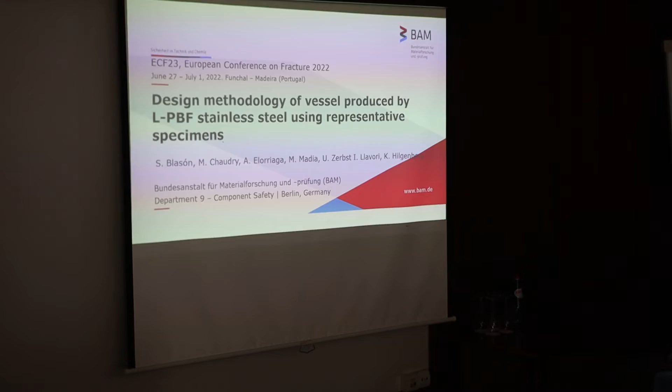So basically the framework of this research project is based on the lack of some regulation in order to evaluate the structural integrity of vessels. You know that when we are using additive manufacturing techniques, still up to now there is no clear idea about the behavior of the materials, and that's why we are interested in developing this project.

In this case, we are taking into account the steel 316L, so it's the same that was used in the previous presentation. And in general, the general aim of this project is basically to develop a design concept of additive manufacturing components in order to identify the most risky areas inside of the component, and from that point try to evaluate the lifetime of the material, of the component in general.

Probably all of us are familiar with the benefits and drawbacks of this kind of materials. We know that there are a lot of benefits in terms of the complex geometry, flexibility and so on, but we cannot avoid the uncertainty in terms of the mechanical properties, mainly due to the difference in the thermal history along the process. And of course, we need to consider the presence of defects that is not possible to avoid, at least up to now. And this also produces different distribution of the residual stresses, which should be taken into account.

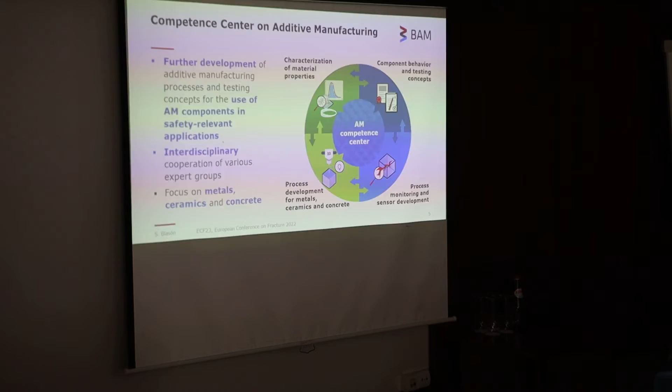I would like to mention that BAM Institute, from the last 2 months or something like that, has founded a competence center on additive manufacturing, and the aim is to try to speed up the evaluation of risky components in order to try to use different components in relevant applications. BAM has a lot of different departments working on different areas. That's why we work with different materials, metals, ceramics, concrete. And since we are an interdisciplinary institution, we have identified different work packages, but in this case the framework of my presentation is involved according to the damage tolerance design. Sorry. Okay.

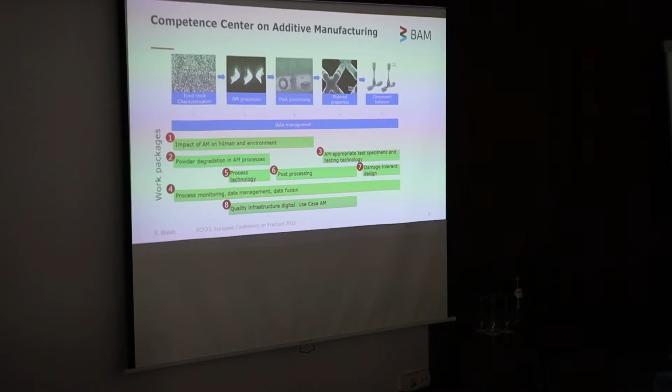So this is the main idea of the methodology that we are proposing. First of all, we want to identify using simulations the most risky area in the component. And from that point, we are going to identify the evolution of the temperature along the manufacturing process. From that point, we want to check the performance of the material by doing, in this case, crack propagation tests and also high cycle fatigue tests. So basically, we are interested in this case in fatigue properties.

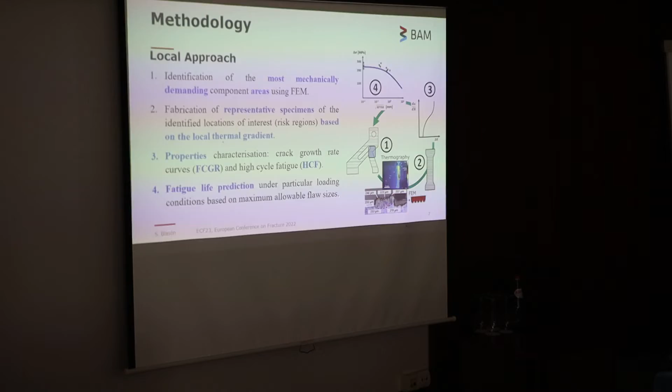And from that point, we want to reproduce some kind of representative specimens, which means that we want to reproduce the same behavior of the original component, but not using specimens extracted directly from the component, but specimens produced ad hoc. And from that point, we want to check the fatigue performance of the material.

So this is the archetype that we are using nowadays. It's a vessel of 316 steel, and the heat treatment was this one, 5 hours under 560 degrees, and basically you can see 3 main areas in the component. The cylindrical part, which can be divided in 2 because we have different thickness, and also the cone, which means that the building direction compared with the direction of the specimens is different in each place, and we want to check the performance in each position.

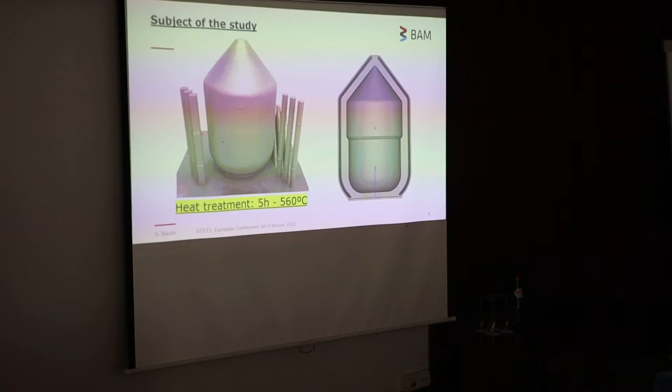So basically, once again, I am repeating a little bit, but we want to compare the behavior of the original component, extracting different specimens and trying to characterize the fatigue response, and then we want to produce some representative specimens, which means that we are reproducing specimens but without extracting directly from the component, and then we want to check the transferability between both sets of results and try to get a good correspondence.

Okay, there is another division at BAM working in numerical modeling, and these results are coming from that department, but it's easy to see that the most affected zone in terms of temperature is the cone, because the time between each layer is lower, so the temperature should be higher in the cone region. And we will see some results connected with this fact.

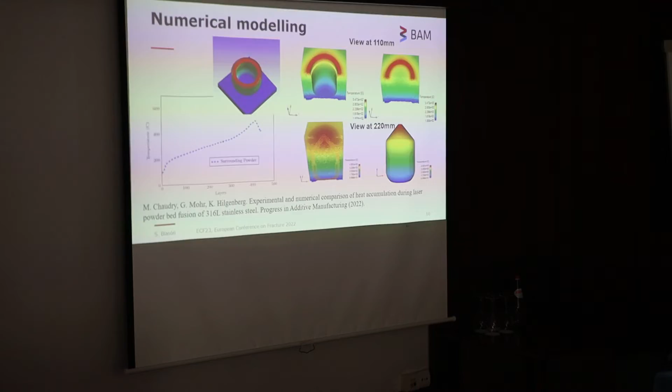Apart from that, since we are basically trying to zone the component, zoning means, from our perspective, trying to identify the most risky area around the component. We are trying to collect as many specimens as possible in order to see any risky area, or what we can call the weakest area of the component. That's why we are trying to collect many specimens.

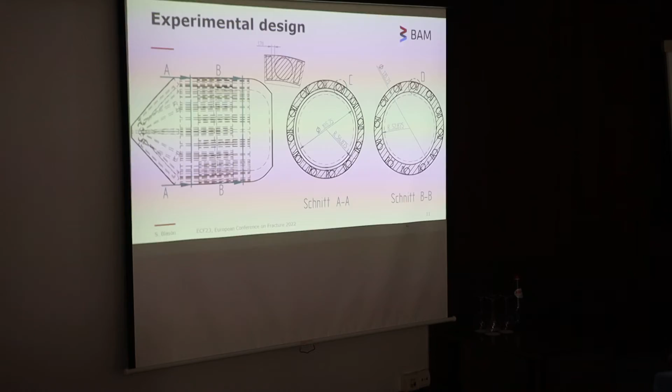We can see the round ones, which correspond to the high cycle fatigue specimens, and the rectangular ones, which are used to complete the fatigue crack propagation test. According to this, for each vessel, we are collecting in total 58 specimens, so we have a lot of information to characterize. And I will show you the main results up to now. I should mention that up to now we don't have the whole results, just preliminary ones.

In any case, according to the fatigue crack rate curves, we are defining a reference plane, which coincides with this one, and we are trying to characterize different positions along the circumferential direction in order to see if there are different responses depending on the position. And you can see here the three regions that I mentioned before. The lower part of the cylindrical part, which has 15 millimeters thickness, the upper part, which is 11 millimeters thickness, and the cone part, which has 45 degrees of tilt regarding the building direction.

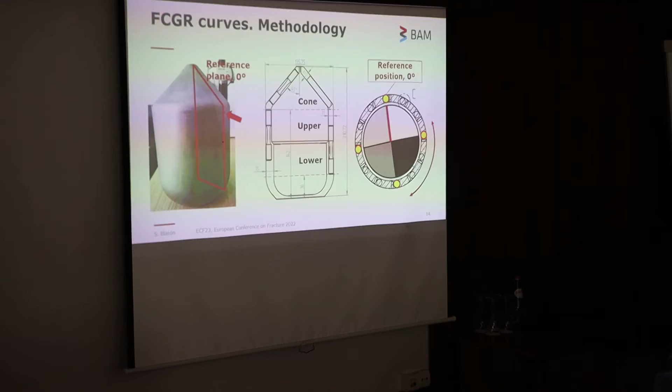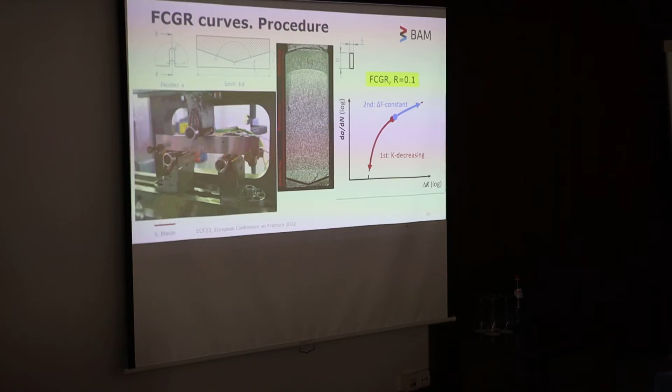And for the fatigue crack test, we are following this procedure. First of all, we go down in order to characterize the threshold regime and also the near threshold regime. And then, if we have enough ligament, we go up in order to characterize the Paris regime. In all cases, we are using the load ratio equal to 0.1. We use this kind of chevron notch in order to avoid any kind of non-symmetrical evolution, because we had some bad experience using the straight notch in the past. Also, I would like to mention that we are using 3 millimeters thickness.

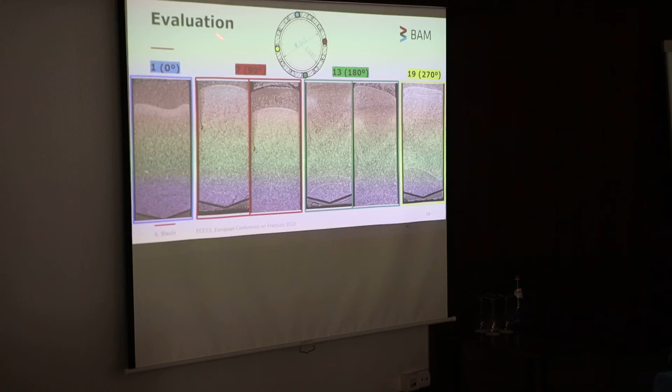And first of all, I would like to show you the images of the fracture surface, because especially in the case of 0 degrees, we can see some effects probably due to the residual stresses. And it's easy to see these effects when we compare the results from the different points that we are evaluating. For example, if we compare 0 degrees against the rest of the positions, we can clearly see some kind of effect, probably due to the residual stresses.

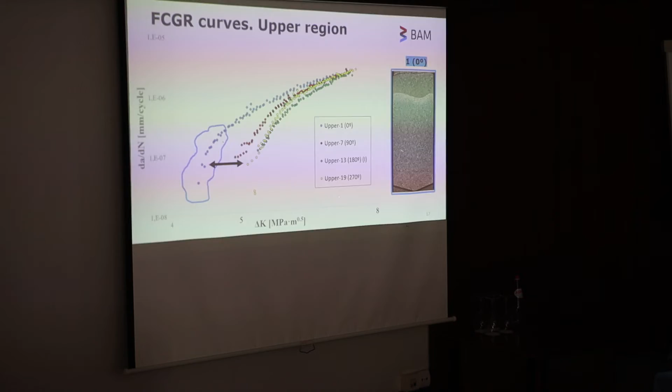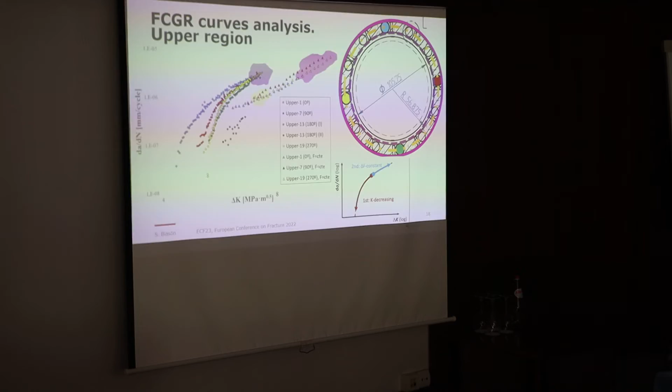Also, an important highlight is that when we compare the behavior of the material at different positions in terms of the thickness, we can see differences, because there is some kind of mismatch under the same loading conditions. So that basically lets us know that it's difficult to manage this kind of material. In any case, when we compare all the results obtained from the 3 different regions, we can see that the cone is the weakest area, because under the same loading condition we have a higher crack propagation rate, and also the threshold value is lower than in the rest of the cases.

And also it's important to mention that even though the scatter in the rest of the specimens is more or less in agreement with this kind of additive manufacturing component, there are some particular directions, both in the upper and in the lower region, that seem to be weaker than the rest of the specimens, probably due to the flux direction.

And according to the high cycle fatigue testing, we only have collected specimens from the upper part of the cylindrical part of the vessel, and when we compare the number of cycles for different positions, here we are using always the same stress range, because we are not able to define the SN field, and also because we want to identify some kind of differences in terms of behavior comparing different positions.

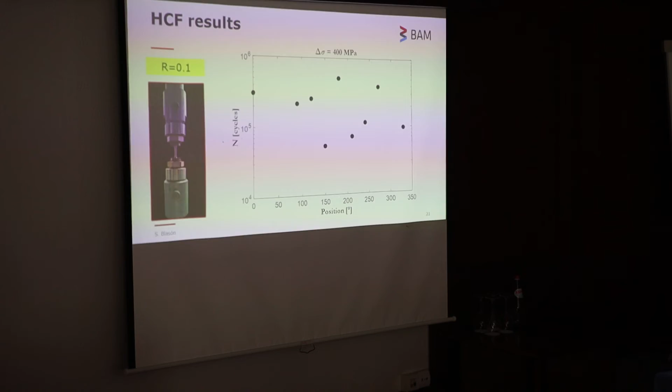So, as a summary, we can say that the thermal histories during the manufacturing play an important role in order to characterize the materials, and also the residual stresses in different positions make it difficult to have a general idea of the behavior of the material. So that's why we think that it's very important to zone the component in order to evaluate the most risky area. And apart from that, it's clear that in terms of the high cycle fatigue results, there is a clear dependence between the lifetimes and the defect sizes.